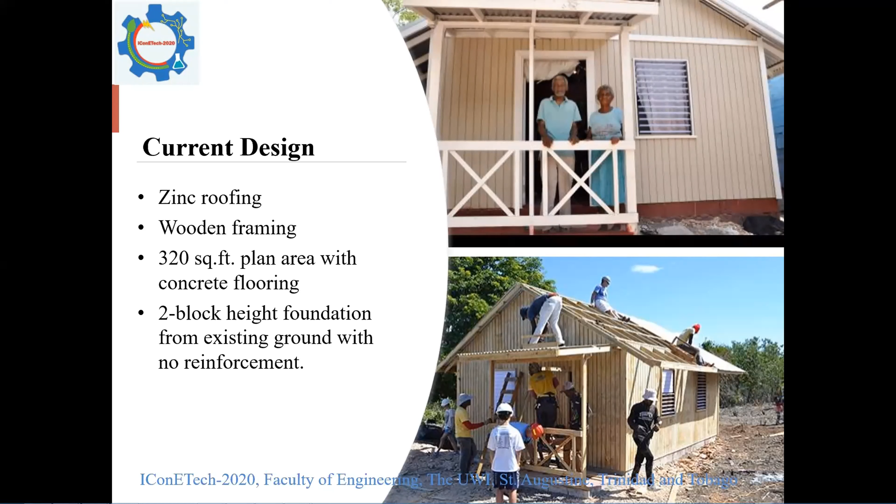In a bid to suitably understand the desire to improve the current design, we conducted 2 site visits in rural Jamaica. At the first site, we saw that the house was located on a steep slope, which called for modification of the current design, as the foundation was now 6 block height from existing ground. We first investigated the superstructure, which was deemed acceptable as the connections were secure and there was an adequate amount of hurricane straps along the trusses and the wall plates.

We then analyzed the substructure, where we saw that there were deficiencies in the design, as there was movement of the foundation, cracks in the blocks, cracks in the concrete slab, and failure of the concrete slab. The team then conducted a site visit to Site 2, where we saw similarities. However, the foundation was designed at a 4 block height from existing ground.

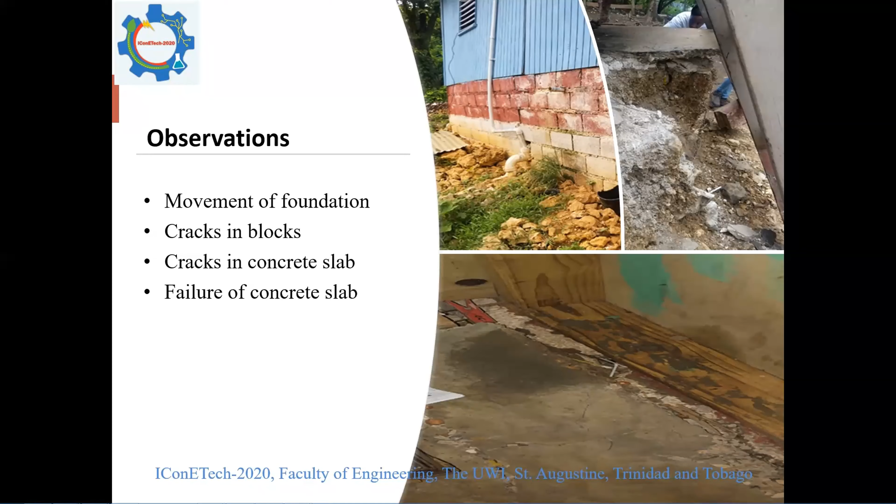We then focused our study on alternative forms of reinforcement for foundation design that are still economical for construction and are better when considering the life cycle. This was done by investigating bamboo and also wire mesh as reinforcement and comparing this to plain concrete.

You may ask the question, how can bamboo be used as reinforcement? Well, bamboo is a versatile, strong, and rapidly renewable plant that has many applications in construction. In 1966, the U.S. Naval Civil Engineering Laboratory provided a set of instructions on how to properly construct a variety of structures using bamboo. Currently in Jamaica, the Bureau of Standards is looking at constructing affordable houses using bamboo, which will be funded by the National Housing Trust with a $54 million contract. So we're hoping that our research can be of some value to them.

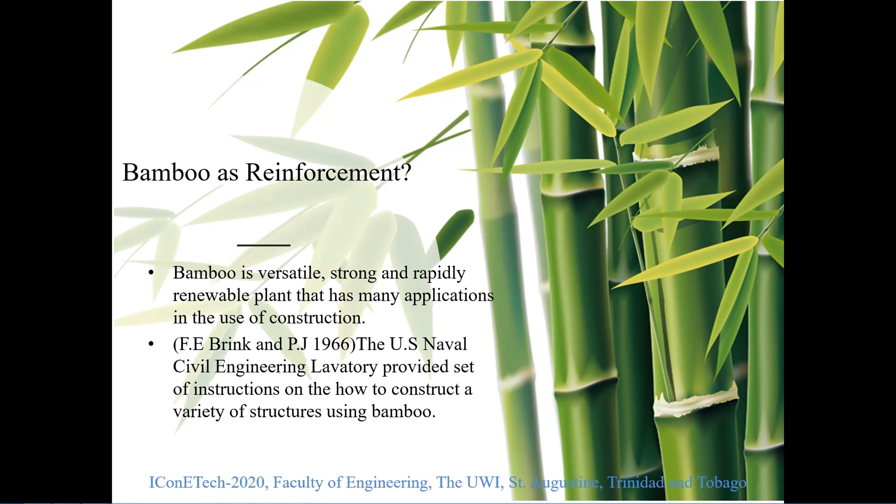You may also ask the question, how can wire mesh be used as a form of reinforcement? Well, it is a square steel mesh manufactured in flat sheets of high-yield strength wire. The advantages include that it weighs less than steel bar, it reduces cracks in concrete, and it provides proper distribution of stress in the concrete slab.

This form of reinforcement is also expected to control tensile forces developed in the concrete as a result of natural shrinkage and also the contraction of the slab as it is being restrained by frictional contact with the ground. The use of wire mesh can be seen in basements and ground sidewalks to control unsightly cracking, leakage, and deterioration as the building ages.

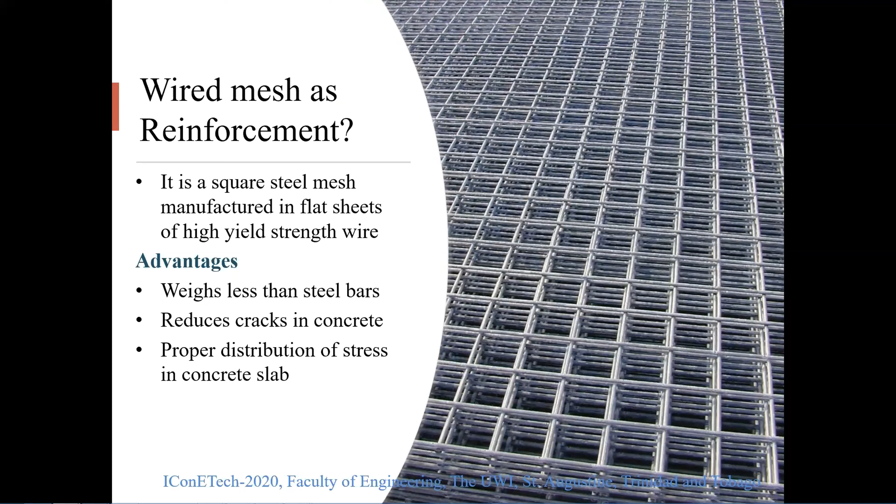In order to conduct the experiment, the methodology is as follows. The bamboo was firstly cut in splints, was allowed to cure for a week, and it was coated in environmental varnish to reduce the swelling of bamboo itself and to enhance the bonding between the bamboo and the concrete. It was also placed at a half-inch cover from the side of the beams and a 1-inch cover from the bottom of the beams, and it was secured using a binding wire.

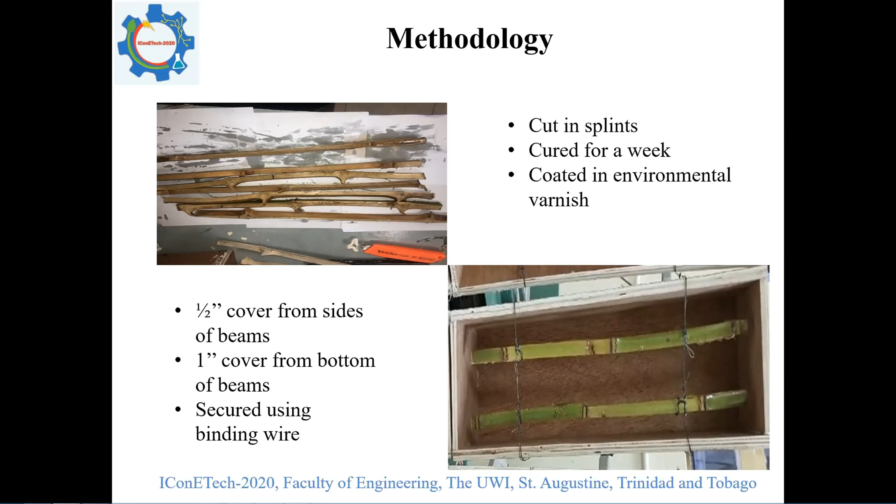We then followed a similar procedure using an 18 by 4-inch wired mesh, which was also placed at a half-inch cover from the side of the beams and a 1-inch cover from the bottom of the beams. We then created formworks of dimensions 5 by 6 by 20 inches using a mix design of 1 to 2 to 4, which was used to create 3 pure concrete beams, 3 bamboo reinforced beams, and 3 wired mesh reinforced beams. We also created 6 cylindrical specimens of dimensions 4 by 8 inches.

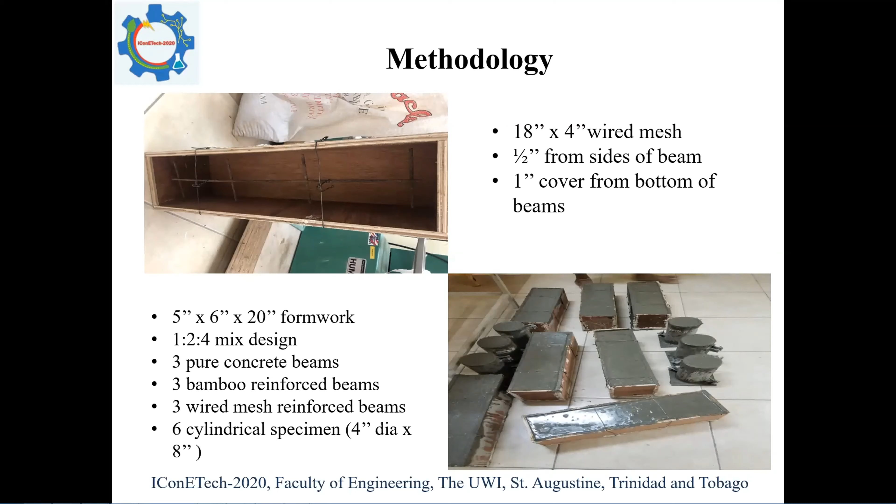When the specimens reached their desired strength, we conducted a 3-point bending test using a universal testing machine. This test provides values for the modulus of elasticity in bending, flexural stress, flexural strain, and also flexural stress strain in response to the material. The image on the left showcases the beam before the point of failure, while the image on the right showcases the beam after the point of failure.

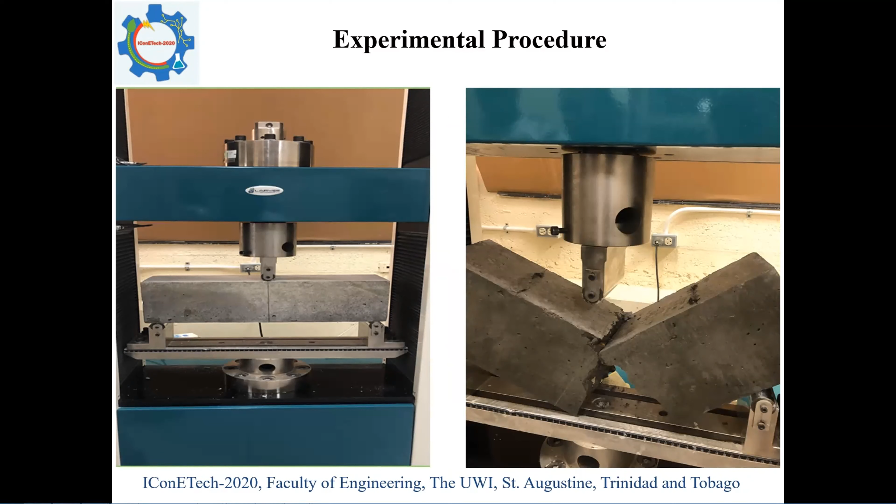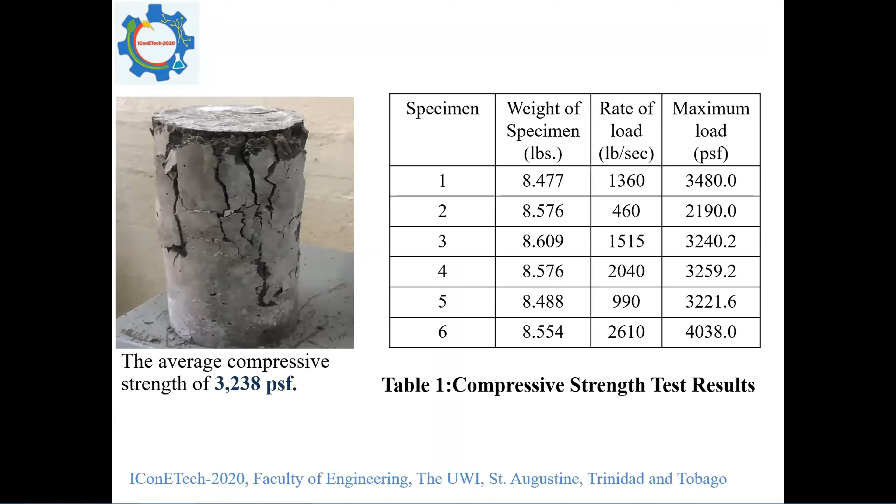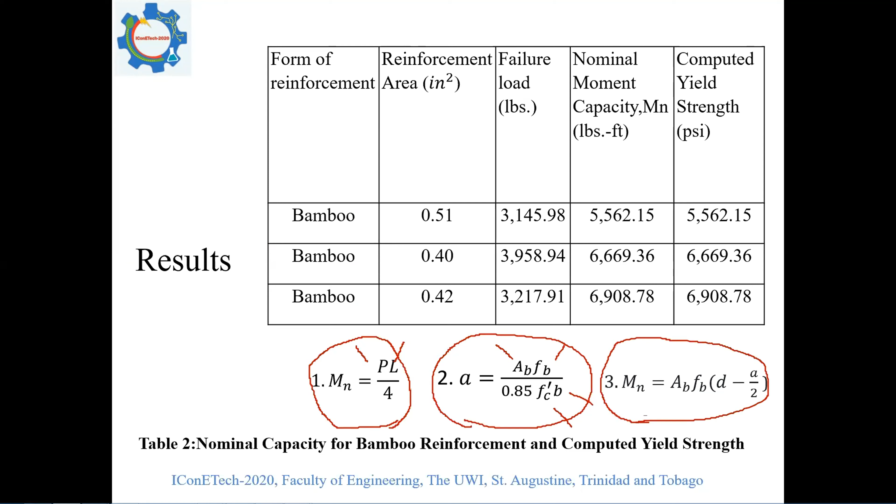We then conducted an iterative process using Solver in Excel, where we equated the nominal moment capacity of equation 3 to the nominal moment capacity of equation 1 to determine the computed yield strength, as can be seen in the table above. We then followed a similar procedure with wired mesh as reinforcement to also compute its yield strength, as can be seen in the following table.

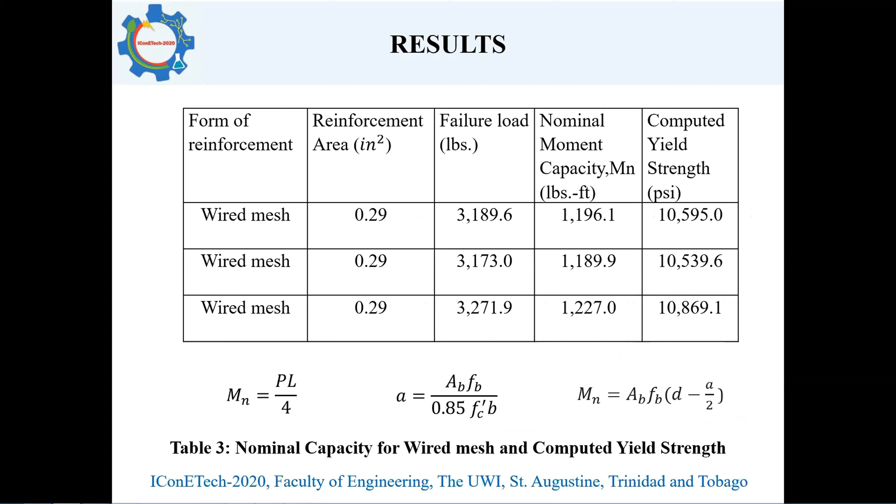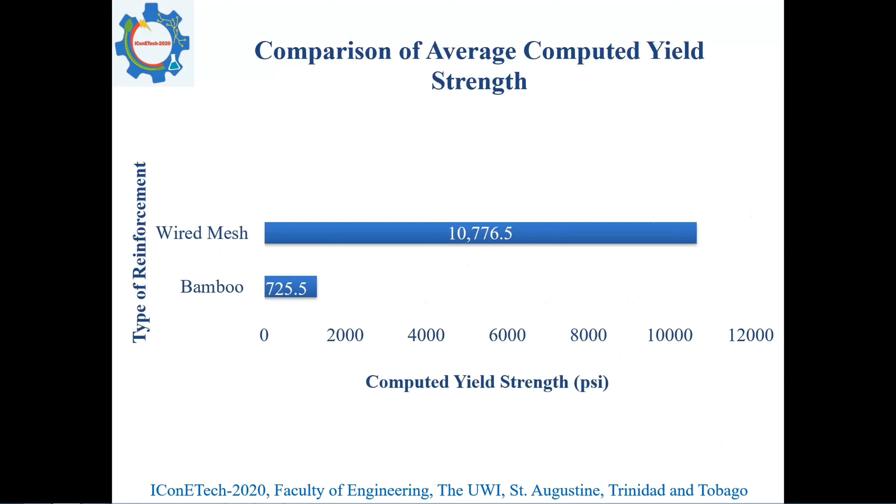Through our study, we found that the average computed yield strength of wired mesh was far greater than that of bamboo, as wired mesh produced an average computed yield strength of 10,776.5 psi when compared to that of bamboo of 725.5 psi.

From our study, we found that the yield strength of bamboo was noticeably lesser than that of wired mesh, as previously stated. However, we believe that bamboo can be used as a sustainable form of reinforcement in concrete slab foundations for temporary structures, as it provided yield strength when compared to that of plain concrete. We also believe that further research is recommended for the proper functionality of bamboo as reinforcement.

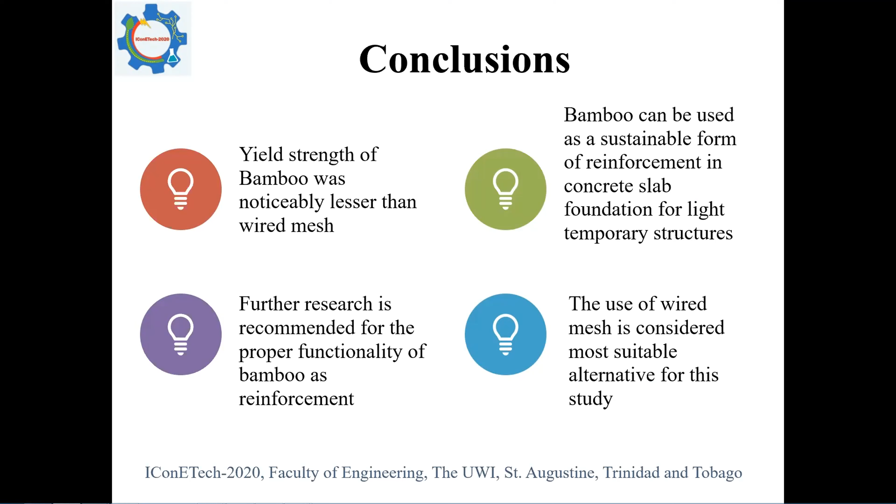We recommend the use of wired mesh as the most suitable form of reinforcement for the current design, which is expected to improve the life cycle of the structures while maintaining a suitable cost. We then propose a slab-on-grade foundation design using a 125 wired mesh as reinforcement in the concrete slab, which was placed 6 inches center to center, and this foundation design was 2 block height from existing ground.